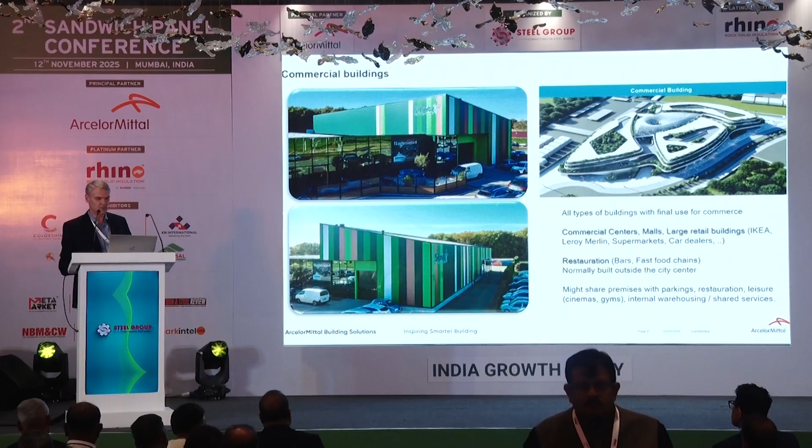Going ahead with the global construction outlook in commercial, particularly from India. In 2025, India's non-residential segment growth is roughly 7% annual, which is more or less stable. This stability means practical demand for commercial buildings, but also for offices and public buildings. Looking ahead to 2029, the commercial segment is estimated at a level of 3.5% CAGR, slower than infrastructure, which is simply visible.

But less volatile, which means investors prefer it. Over the long term, non-residential value rises from 200 billion in 2025 to 300 billion, which is 50% more, in 2035. So percentage growth moderates, but dollars invested keep climbing, which also affects fund pipelines and capacity.

Going ahead with the value drivers and limitations for the commercial sector in general, we see that the benefits go mainly with technical performance of the sandwich panels, which is fire resistance, safety compliance, as well as thermal and energy efficiency, where we can supply sandwich panels with thermal resistance up to 9.

Also, acoustic performance is very important. It was mentioned several times that structural lightness and architectural freedom are also important, not only for residential but also for commercial buildings.

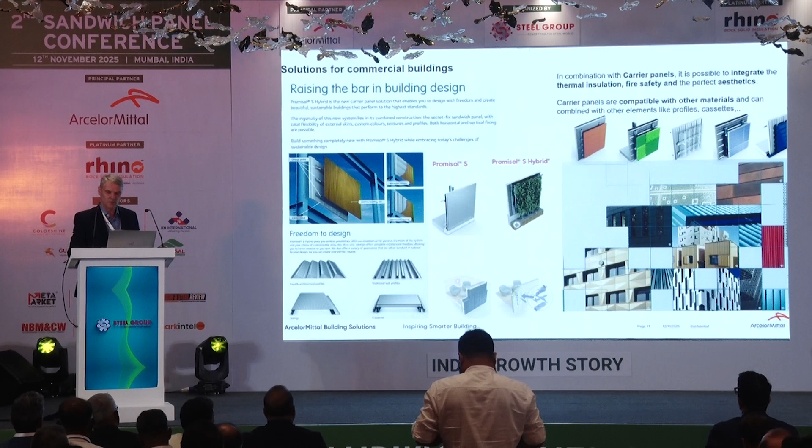I added some slides for solutions which could easily be developed and delivered for commercial buildings in general. You have two types of application: one is a sandwich panel standing alone as a structural element of the facade, or you have carrier panels where the sandwich panel is part of the wall structure.

This means you can get thermal insulation, fire safety, and aesthetics while combining a sandwich panel with profiles, cassettes, or different materials. Think of the carrier as an engineered backbone - one system, predictable outcomes, multiple architectural finishes.

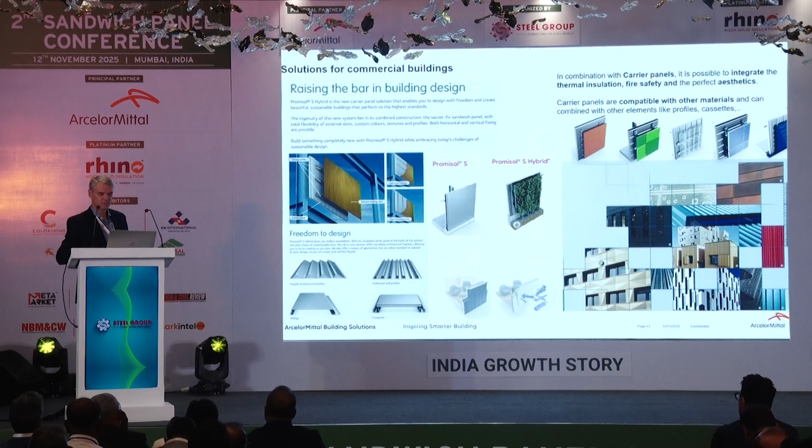The second point I'd like to highlight is renovations. We need to do it smarter, which means fast and less disruptive for the business, of course while compliant with the standards.

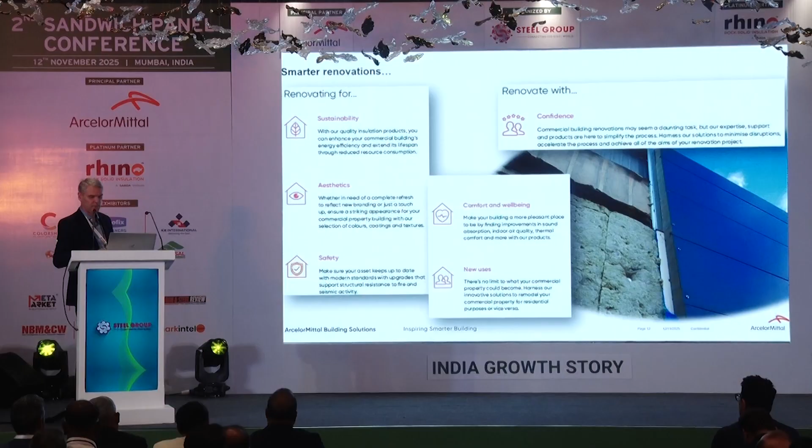Sandwich panels are clean, smooth, and really fast to install, so finally you get thermal upgrades for fire compliance. You need to consider different aspects, such as comfort and well-being in the use of the sandwich panel in the building, aesthetics, and sustainability - which type of materials can be used from a recyclability point of view, end-of-life assessment, and so on.

Here I add some references from Europe, just to give you an idea of how it's done there. This reference is from France, where the Promisol panel is used in black and brown color.

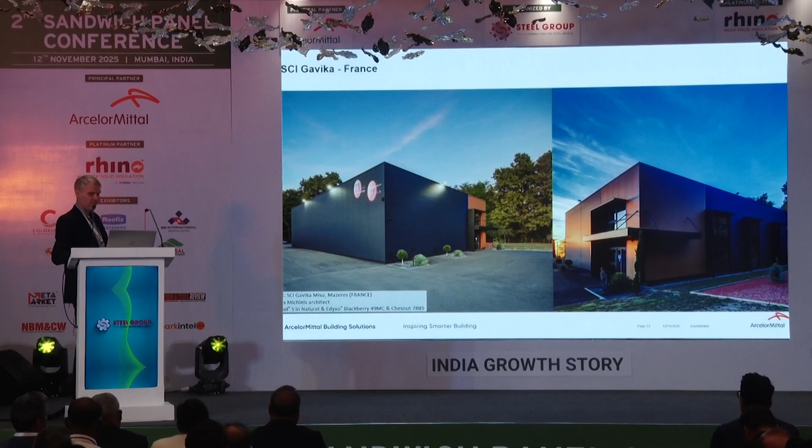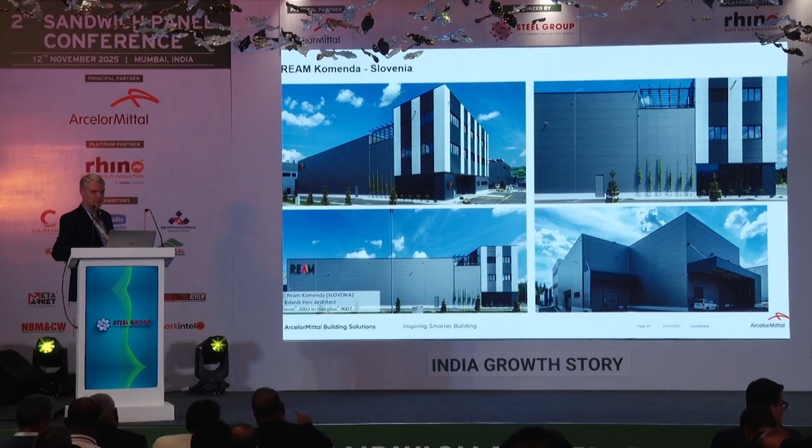There's also a project in Germany with IKEA, where a sandwich panel was delivered mainly due to two technical performances: one was thermal performance, and the second, also considered very important, was fire resistance.

Now I'm sharing some reference from Austria when the sandwich panel was used as a structural element of the facade for a mountain station. Microprofilation and solar panels included for a facade.

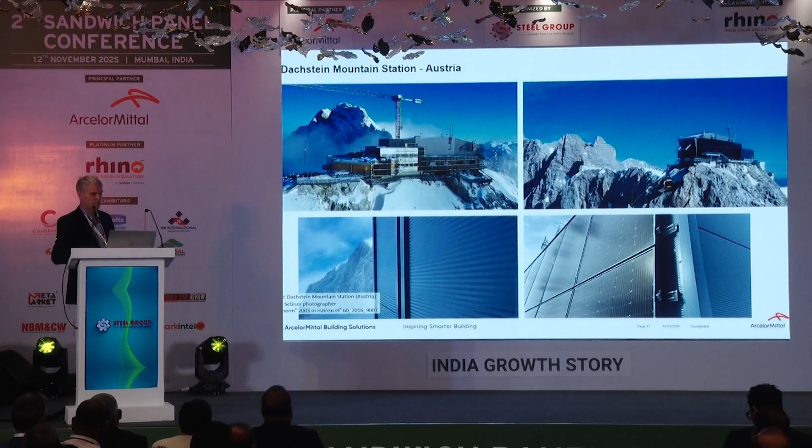Now moving ahead with the residential sector. Here we speak mainly for single dwelling and multi-dwelling buildings. Multi-dwelling means multi-story buildings. The situation for residentials is more or less the same as for commercial.

The total growth in 2025 is around 7%. 2024 was remarkably stable comparing with other years. Through 2029, the structural runs at a CAGR of 6%. In value terms, we move from 400 billions in 2025 to 600 billions by 2035, which is again 50% more.

Key takeaway: residential market is stable, a volume engine, and a natural fit for standardized prefab solutions, which I will show you later. When it comes to the challenges and benefits for residential sector...

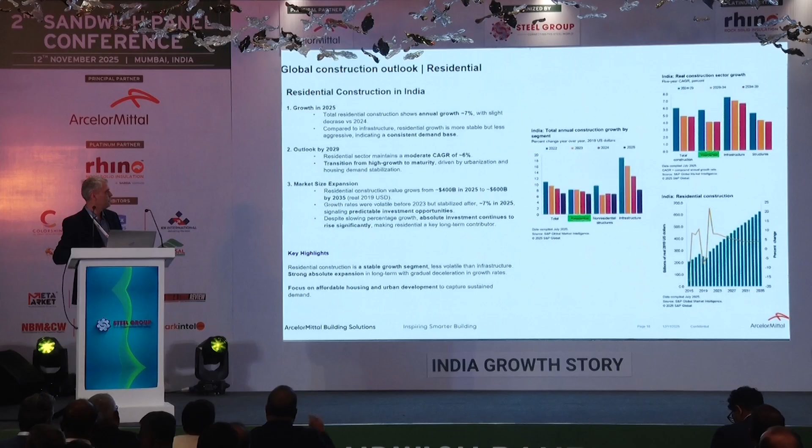More or less the same as for commercial one, but majorly running with energy efficiency, which is important, reducing energy by 20-30% by using HVAC. Speed of construction is very important. Cost efficiency. Comfort and general thermal performance. Design and flexibility, using compatible materials with modular, hybrid, and conventional solutions.

When it comes to the challenges: thermal and environmental regulations, reducing the carbon footprint, fire safety compliance, shortage of skilled and specialized labor, and limited awareness in rural markets about sandwich panels in general.

Here are some applications I've added from a European perspective, when it comes to modular solutions. In our company, we have developed two types of systems: the curtain wall modular solution where sandwich panels are used, which allows faster installation and erection compared to standard materials like bricks and RCC, with a speed of up to 50%, and high thermal performance.

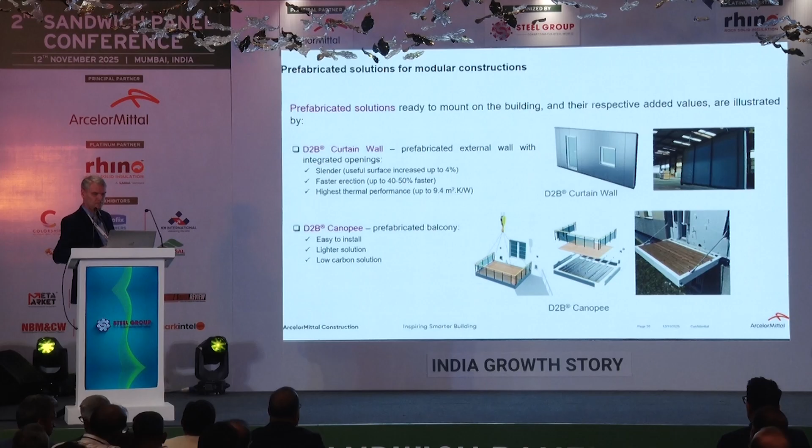And also for the residential sector, you can use the balcony system, which is easy to install and lighter.

When it comes to performance, both solutions can be done with a sandwich panel made of PUR, PIR, or mineral wool, depending on fire safety and thermal performance requirements. We have certified solutions where the modularity goes up to 3 meters high maximum and 7 meters length, and of course it depends on the thickness of the panel used. Also, the performance differs within the system.

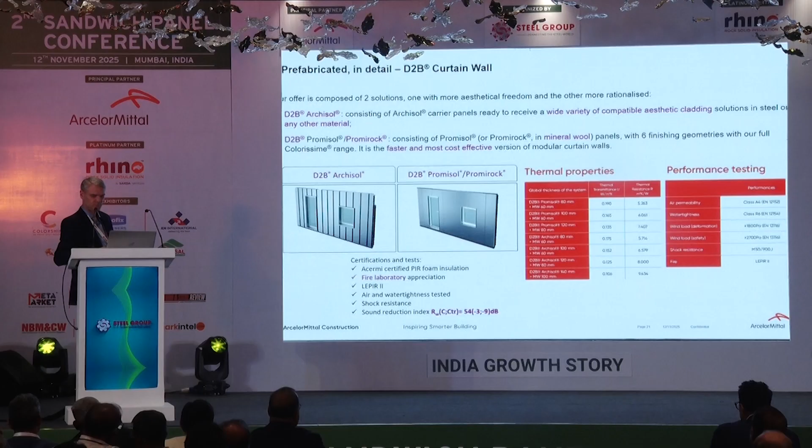What are the renovation trends in general in Europe? It's mainly linked with the extension of buildings, going both vertical and horizontal. For such applications, you can use lightweight solutions with composite floors. You can develop more fire resistance of the building depending on the application, and it can still be used as the lightest floor solution for both vertical and horizontal extensions in general.

What is also important to mention is environmental impact and performance. Such systems can reach fire resistance up to 120 minutes or even 240 minutes while using mineral wool sandwich panels.

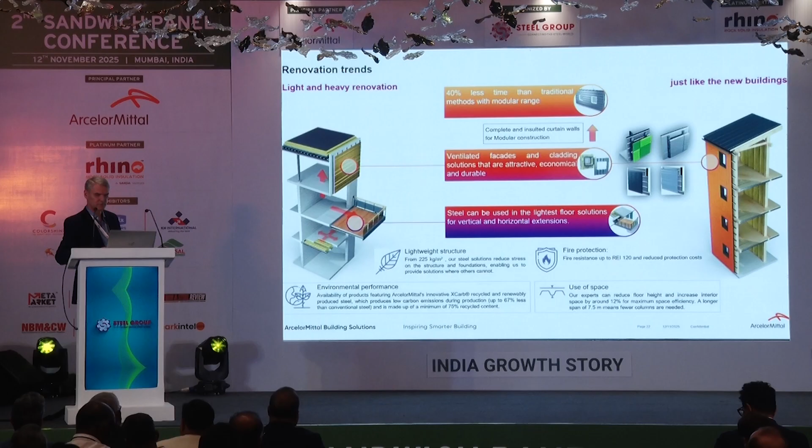For the curtain wall in general, here is a case study we developed for the European market. I would like to highlight that when you compare the thermal performance of the structure itself, you can see on the image that the brick wall, which is 173 centimeters in width, has the same thermal performance as a 5 centimeter PIR panel.

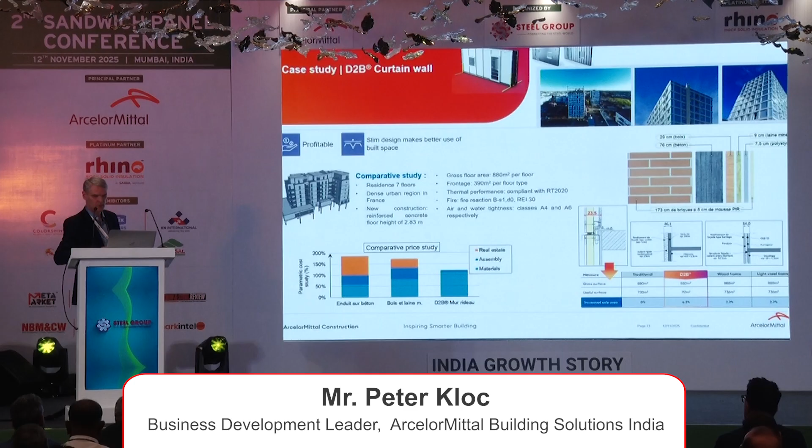So all this has been translated, and the solution being shown right now is linked with savings on floor surface, which can go up to 4% compared to traditional solutions. This study was done for a residential building 7 floors high, with a declared fire resistance of REI 30, following the European standards.

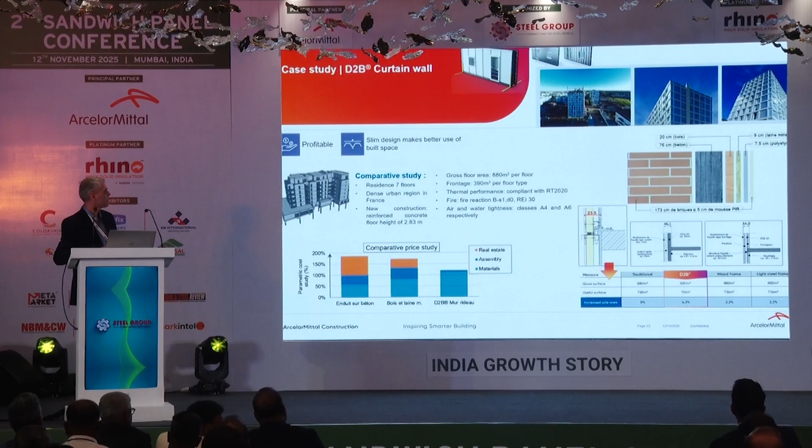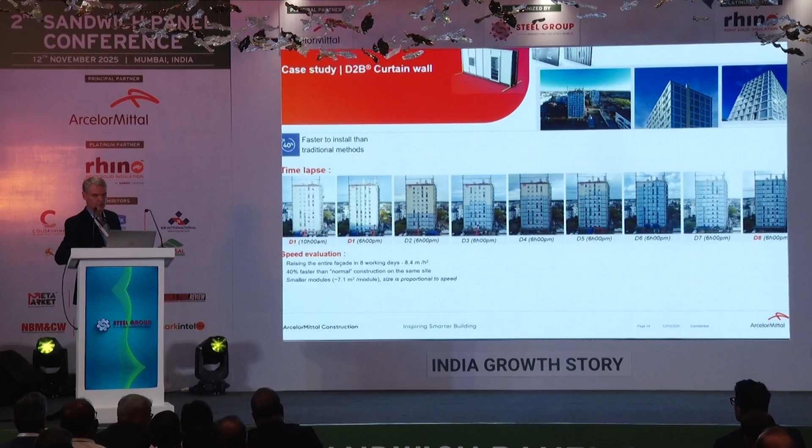And smaller modules around 7 square meters were used. Some references from Europe again.

Here it is the residential buildings where the canopy or balcony system has been used. You can see underneath the balcony that the mineral wool sandwich panel has been added as fire protection for the facade, in case of fire spread within the building envelope.

And here it is the residential sector, where fire-resistant panels have also been used for a roof application. So that's all from my side for today. Thank you very much.